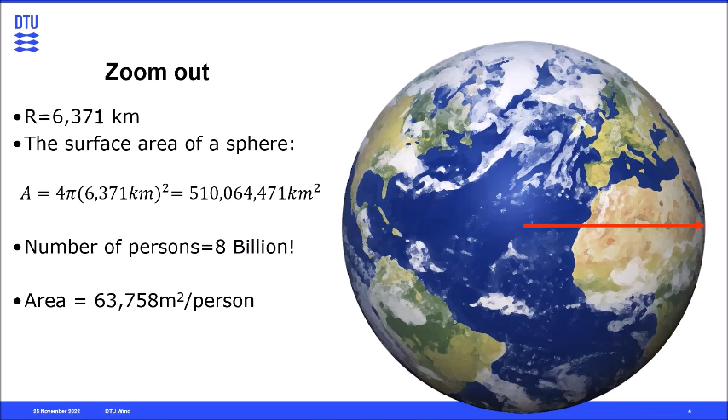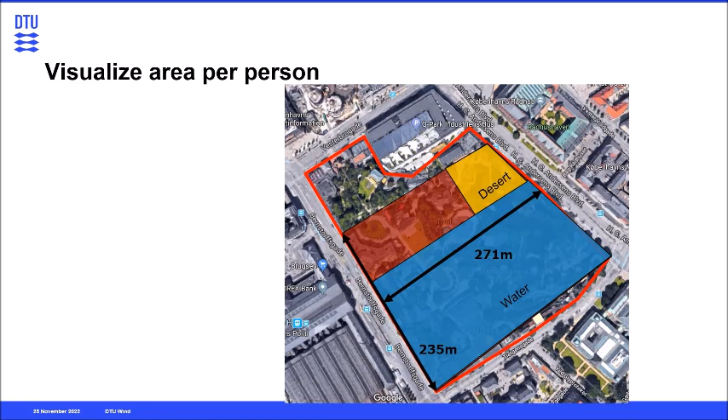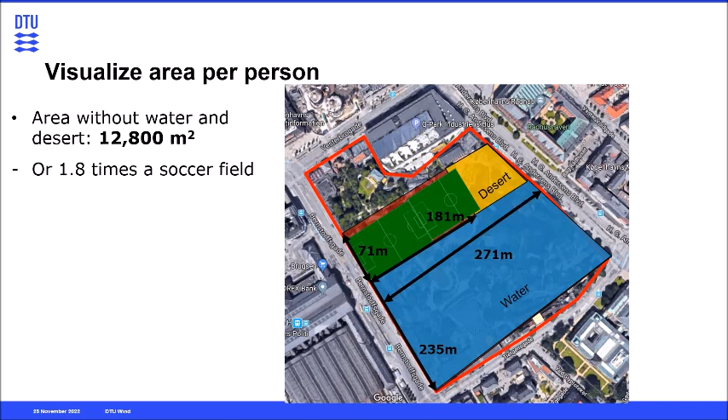What is 60,000 square meters? Well, that can fit inside Tivoli Gardens. The red line shows Tivoli Gardens, and this red rectangle shows the 60,000 square meters. And if we then say 70% of this is water and a third of the land is desert, then we have left 12,800 square meters, or 1.8 times a soccer field where we can live. That's how it is. And this area won't become bigger, because we will be more people.

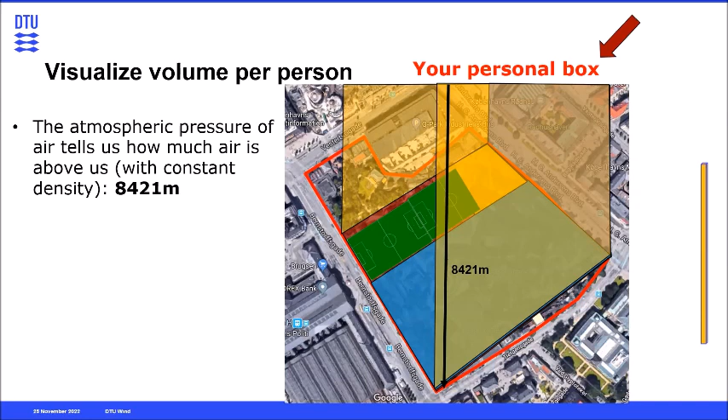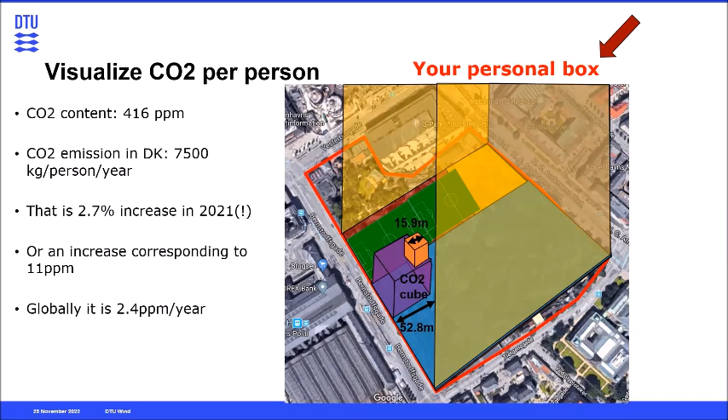You can also find out how much air is above us: 8.4 kilometers of air if it is at the same density. So we live in this straw, 8.4 kilometers high, with an area of 60,000 square meters. If we then look at the CO2, right now we have 416 ppm. We let out 7.5 tons CO2 per person per year in Denmark, an increase of 2.7% in 2021. A Dane will then increase the CO2 by 11 ppm per year. Globally, it's 2.4 ppm.

So to put it directly, we float in the ruthless universe on our 1.8 soccer fields. We have one person here, we have to get food from this area, we have to let out the garbage and so on. So we just have to organize our life in a sustainable way. That's my point. Enough of purpose.

Now I want to tell you about aerodynamics. I will tell you about the background for my research, and then give you selected examples, because I could probably talk for hours, but I have to limit myself. I will tell you about airfoil performance and design, about rotor performance and design, and then of course the polar rotor, and something about teaching and projects and my vision.

So the background for my research is that I arrived at Risø back in '97 to a very well-functioning group of persons led by Flemming, together with Kenneth and Gunnar and Per Vølund and Helge and Niels and Jørgen Thirstrup and Peter Fuglsang and more.

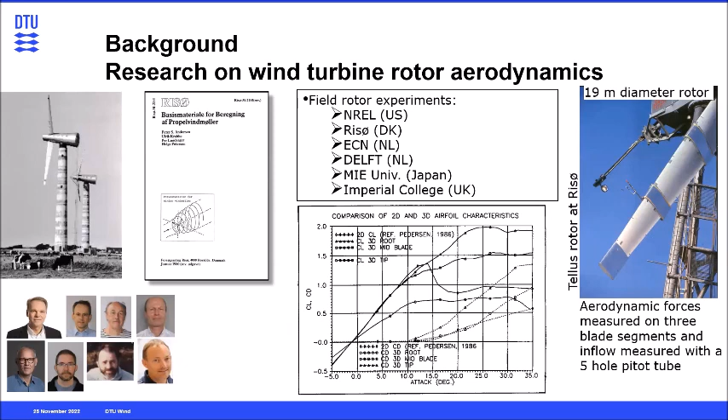So for me, it was an excellent start. I started on super solid shoulders. So this is where I then continued the work from this together with many persons. I will now give you some selected examples. Start out with airfoil performance and design.

So here you can see NREL. They made this test of a 10-meter diameter rotor, put in the world's biggest wind tunnel. A lot of people had to do this together at NREL. So they made this excellent data set, and then I analyzed this. Then I took pressure measurements from 5 different sections on this blade and, not tested it, I analyzed it and realized that this,

this black curve was something tested in the wind tunnel, this lift curve. But if we then analyzed at the tip, then we had the red curve. And if we analyzed at the root, then we had the blue curve up here. So it turned out that even though we tested in the wind tunnel, it was not so easy to know how we should describe the forces on the turbine.

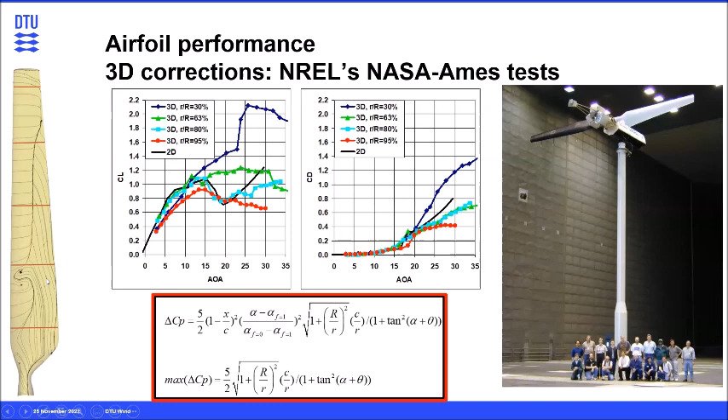So then this 3D correction is about taking what is in the wind tunnel and then correcting it for the forces. And because there are some centrifugal forces running out the blades, you can see the streamlines over here. And then I made this model. And I tested it against another turbine. This is an active stall regulated turbine.

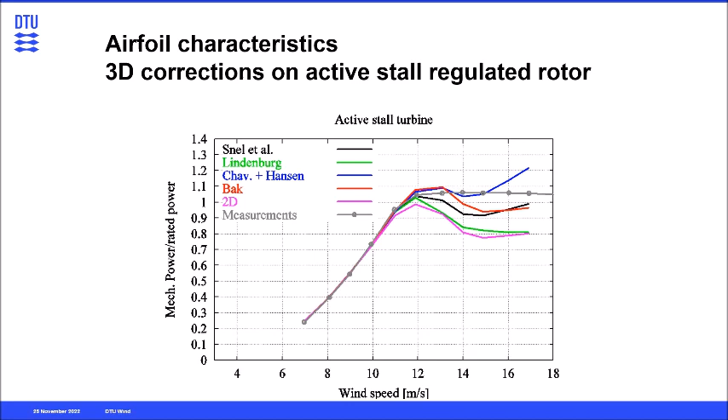And at that time, it was very, very important because turbines were stall regulated, a lot of them at least. Now it's less important, but still important. So this was, you could say, a huge area during the 90s. Then airfoil design was also very important because wind turbines used a lot of airfoils from airplanes. And they didn't really have the right specifications because they were made for takeoff and landing and so on. So we designed different airfoils.

We started actually out with the Risø-B1. There were more before this, but this was the first one that I really was involved in, this Risø-B1. Then I came to the Risø-C2 airfoil, and later also this light rotor project airfoil. So this was again in collaboration with researchers, and during this phase, we realized what was needed for wind turbine airfoils.

So when we run in normal operation, we need the airfoils to be very efficient aerodynamically, and that's the aerodynamics. But then you also have to take care of the loads, and this has something to do with the maximum lift. Should it be high or should it be low? You also have to make it reliable, so we have to put the transition point in the right place, the transition from laminar to turbulent flow.

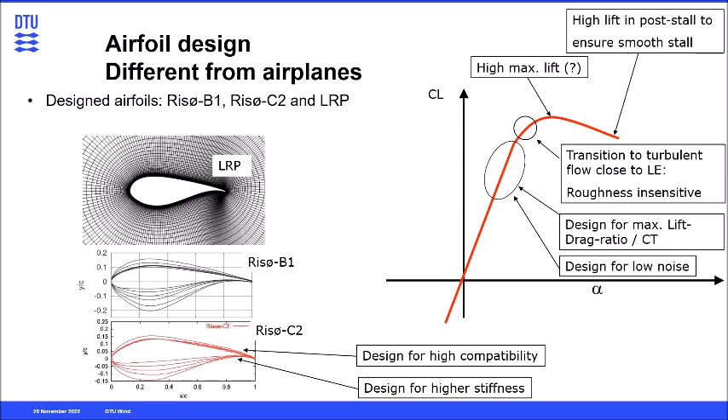We have to ensure something about post-stall, how is it actually separating out there? And then for sure, we have to make design for high compatibilities and design for high stiffness. So this was something we learned during this process of designing the airfoils.

And we tested the airfoils, and here you can see B1 and C2 airfoils tested, and they are very similar. You can say C2 is kind of an update of B1, so we have actually a slightly more efficient airfoil in the C2 airfoils. But what we also did was to license these airfoils.

So we licensed it to many airfoil or wind turbine manufacturers, and they have used it in their megawatt designs. And I could read them, and I don't say where this goes, because that is not what those licensing the airfoils want to let us do.

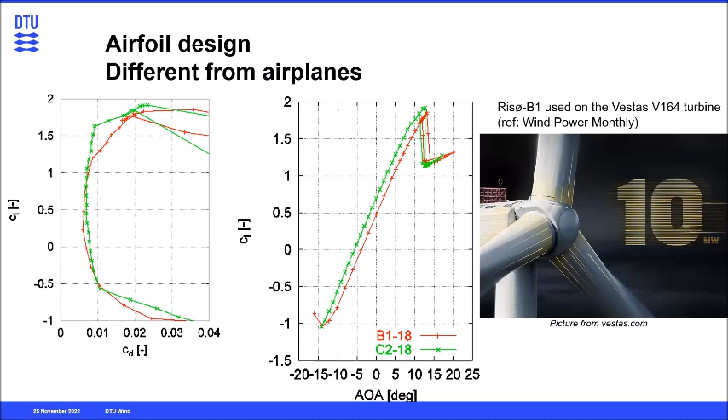But I could read in Wind Power Monthly that these airfoils were actually used in the 10 megawatts Vestas V164 turbine, and this is actually, you can say, the ultimate test of our research, that we can actually go out with our research and let the industry use it and move forward and make things better. So that's, you can say, ultimate test of the quality. And of course, I'm also super honored that they actually dared to use these airfoils. So that's super nice.

Rotor performance and design, I also have worked a lot in. So I want to tell about the dynamic test that Ignacio also mentioned. So the background for this one was actually the NASA Ames test that we saw before. It was also the Mexico test, both wind tunnel tests where we had model rotors tested, and they were very good because everything was in control and we could test a lot of different things. What was not in the test was the actual size. It was the atmospheric inflow. It was the aeroelastic behavior of the turbine and so on.

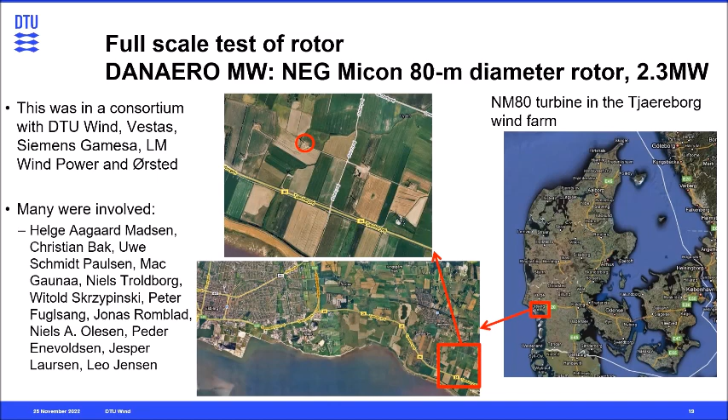So Helge took the initiative to make this project in collaboration with Vestas and Siemens Gamesa, LM, and Ørsted. And you can see we were many involved in this project because if we really want to make a great effort, you also have to be many persons together to do it. So we selected a turbine just south of Esbjerg, and then we wanted to test on this turbine. And here you can see a blade specially made for this test. We have 4 different pressure rows covered with tape, and you can see Helge, Jonas Romblad, and me standing there, and it was mounted on the NEG Micon turbine back in 2009.

Here you can see pitot tubes mounted on the blade, and you can see this special high-frequency inflow sensor also. And all this was then data that came from these tests. And they were analyzed in this International Energy Agency Task 29, and also now in Task 47. And now these data are just on a disk. It's a database, and you just go and take these data. But before it will be data, there's a lot of work behind this.

I found actually a movie from just such a day in the test campaign, where we started out looking at the weather and say, in 2 days we have good weather, everything's good, we can test. We hire a lift, and then I went 5 o'clock in the morning to Esbjerg, and I met the technicians 8 o'clock in the morning, and then we started out. And we started out by unmounting tapes on the turbine and then starting, you can say, the measurement process. And they are then going by the lift up to the first section.

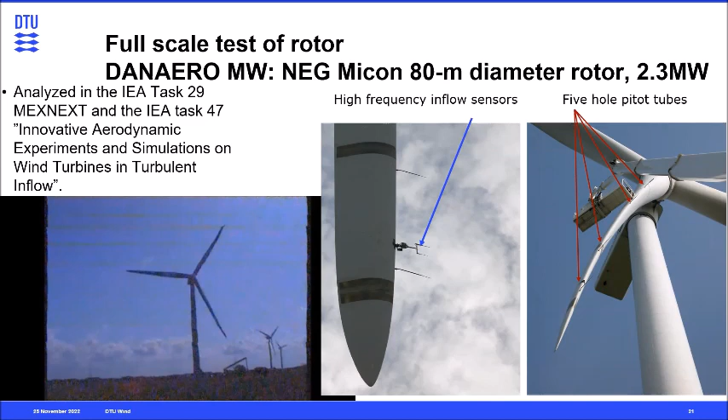I'll take it again. They went to the first section, unmounted the tape, and then they went again to the next section, and then finally we could start the campaign. As you can see in a moment, then we are running the turbine. But such tests cannot be done without excellent technicians. So we have to really have excellent competencies all the way from the super theoretical parts to the very practical parts. Otherwise, such things cannot be done.

And results from this test, you can see here, this was an investigation of the transition from laminar flow to turbulent flow. For those not familiar with this, at the bottom here, you can see a laminar flow where it's layered flow, and then suddenly at one point that we call the transition point, it turns turbulent, and then the boundary layers will grow more. And because of this, the more to the leading edge we have the transition point, the bigger the drag will be, and the less efficient the airfoil will be. So it's important to know where we have this transition point.

And as you can see in these plots, black is laminar flow, gray is turbulent flow. This transition point actually moves around when the blade is either up or down. But even though we have this, there will still be fluctuations. That is also because of turbulence in the air and so on. This is the lee side of the turbine. This is the wind side. So this is the pressure side, and this is the suction side. So this is very important, very unique.

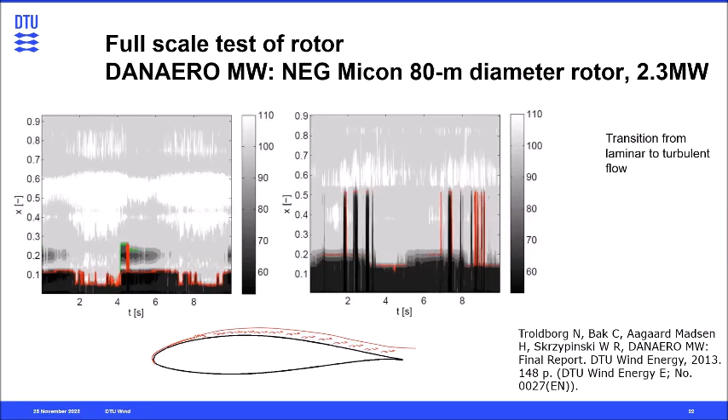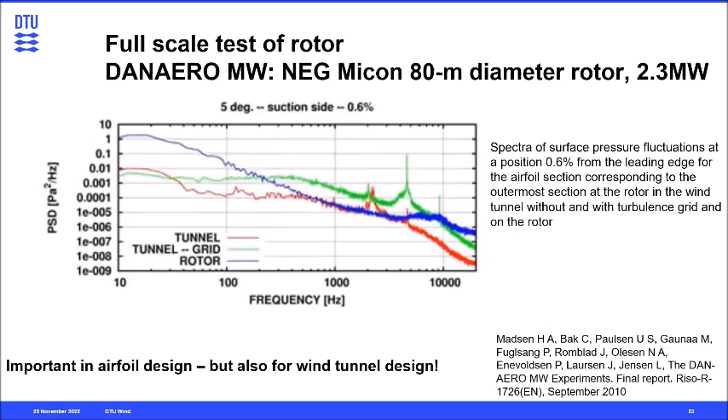I will turn to rotor design, because I was responsible for this 10 megawatt reference wind turbine. And that started out in the LightRotor project, again, together with many persons. And in this LightRotor project, we wanted to make bigger rotors lighter, because we have to fight this square-cube law, as we call it. So in this LightRotor project, we wanted to have a starting point for the optimization, but we couldn't get a blade, so we had to make a blade.

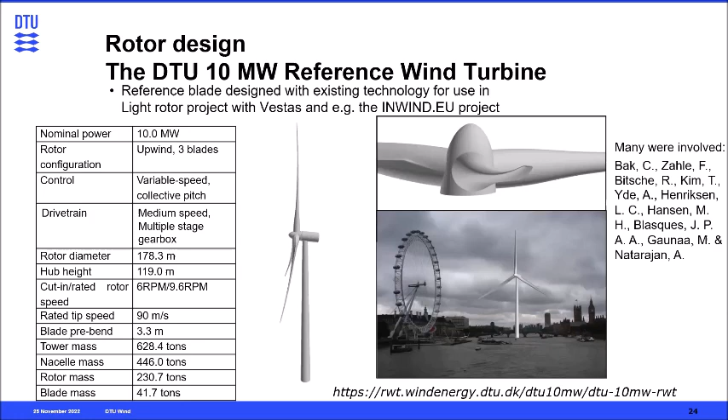So we made this reference wind turbine, where we had aerodynamics and structural layup being absolutely consistent. So, you can say, the airfoils were consistent with the actual aerodynamics. So this was made to support such an optimization process. And the objective was to make it as a starting point, and then we also could test our tools, HAWC2, HAWCStab2, BECAS, HAWTOPT, EllipSys 2D, 3D, and so on, and establish an open source model.

To the right here, very nice computations on the blade, and then we used this setup and this reference turbine to optimize it. And you can see an example over here where we have the short blades. This is seen from two different sides. The shorter ones are the DTU 10 megawatt, and then we could actually increase the length and thereby the energy by optimizing it. So the DTU 10 megawatt reference turbine is not an optimized turbine, it is just a turbine that was made in a sequential way, so we could get, you can say, just a traditional turbine made.

And it was not only us actually that had the use of this. When I checked last week, we had more than 30,000 downloads of the description of the turbine. So that was nice that somebody out there could actually also use this turbine.

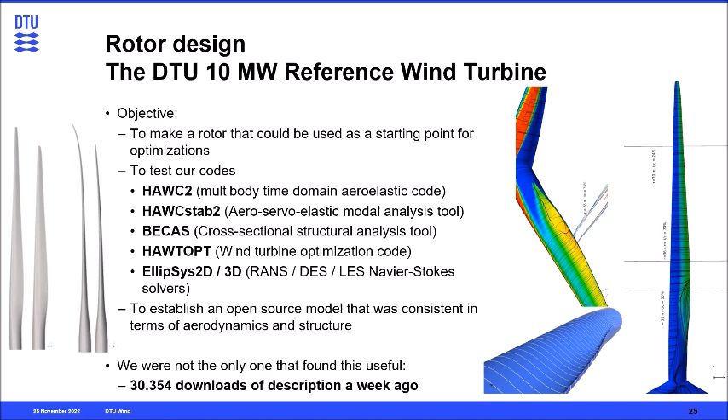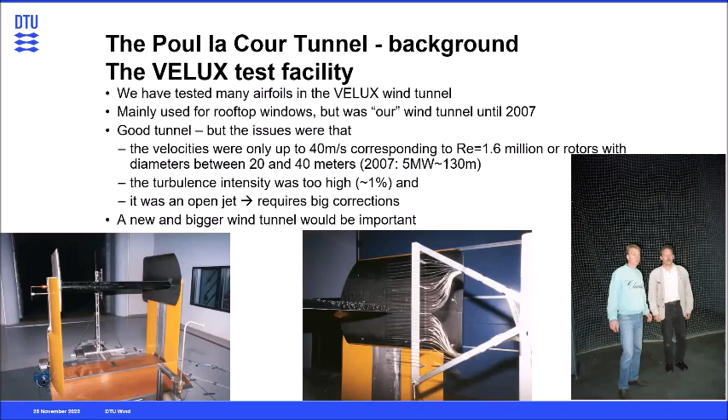I will go to the Poul la Cour tunnel now. The background for that one was that we tested in this Velux tunnel for many years, starting out in the early 90s, and this was actually our wind tunnel until 2007, where we made our last test. It was actually a good tunnel, but we had some issues because the velocities were so that we could only make tests corresponding to diameters between 20 and 40 meters, and in 2007 we were at 130 meters. So there was a bit of a gap there. We also had a turbulence intensity that was too high, and it was an open jet, so it required big corrections. So we simply just needed a bigger and better wind tunnel.

And we did so. We actually got a project granted where we talked with the stakeholders in Denmark, the industry, the universities, the developers, and so on, all stakeholders. And we specified a test section, where you can see the specification here.

And we also should do this for a fixed amount of money. So that actually was a challenge, you can say. And what do you do if you don't know how to build a wind tunnel? Because now I know, but I didn't know at that time. So we were kind of blank, even though we had many good people. So we should build this tunnel for this purpose.

And then I tended to say at that time that we had to go in a Pac-Man mode, just eat one cheese at a time and get a solution to what about EU regulations, what about power to research, what about, and there were a lot of small things that we had to solve during this process. So that was fun.

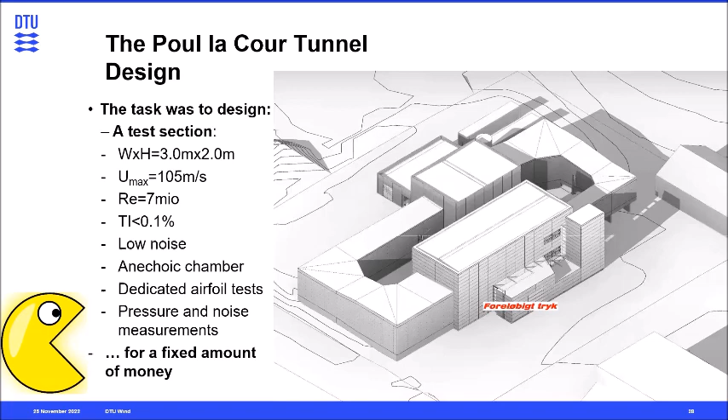Drawings are very nice because you can always undo stuff. You can always go back and change something and say, no, we don't want it like this. But when you drive in tons of concrete and steel, then there is no undo button. And if you had made an error, then it would stay there for 50 or 70 years or so. So that was both very rewarding to see it growing from the ground, but also a bit scary because we didn't know how it would work actually, to be frank. So such a one-off thing is interesting to build.

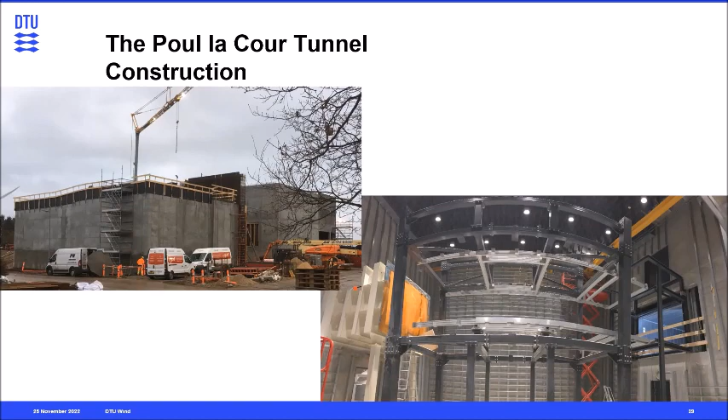And then we came to the first operation, and we had a sprint team working day and night up to this inauguration. Robert, me, Jimmy, Sigurd, Andreas, Anders, and that was fun and hard. And then also, the first day we should switch on the fan. That was also very interesting because that was the time where we didn't know if the cooling circuits would break down or the guide vanes would stall or something did not happen the right way as we thought. So here we can see how

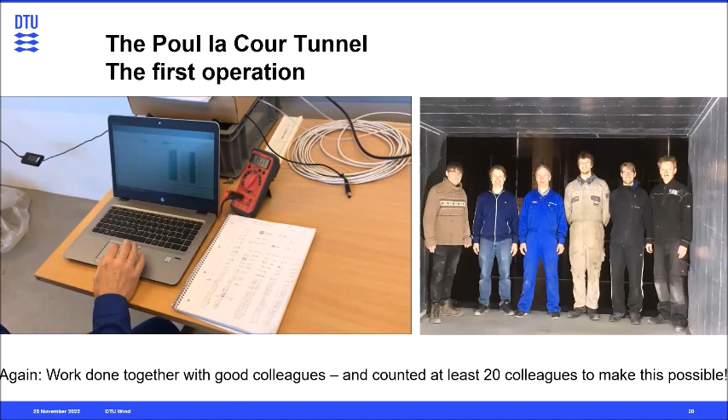So this was very noisy, and that was very low tech to sit with a paper and a pen and a voltmeter and a pitot tube, but that was how it was at that time, and very efficient and very interesting. That was a very important day for us to see that it actually happened the right way, and it worked super nice. And we had this inauguration with His Royal Highness Prince Joachim. That was also a great day, to show this nice facility to the rest of the world.

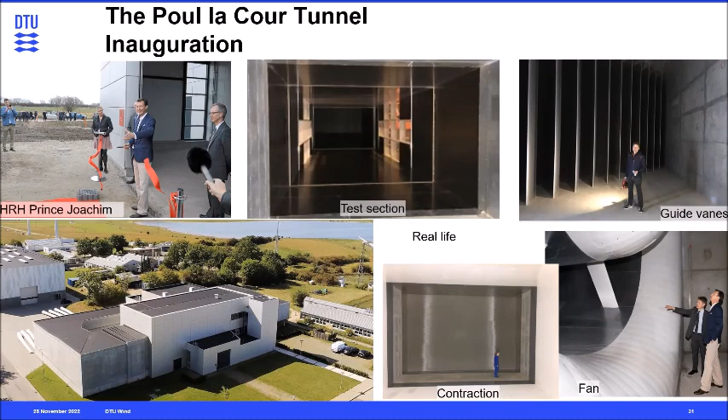And we continued after the inauguration, of course, because we had to instrument this wind tunnel with different configurations. We had the aerodynamic configuration, and then we had the aeroacoustic configuration. So the aerodynamic configuration has these glasses and hard walls included, so we can actually test the aerodynamics at very high speeds. And then we have these Kevlar windows that can confine the flow, but where the noise can be emitted through the Kevlar and then be measured by the microphone array out here.

So we actually obtained what we wanted. We obtained the high flow speeds up to and more than 105 meters per second. Check. We obtained the low turbulence intensity below 0.1%. Check. And also we obtained the low background noise that we had hoped for. Check. So that was very nice to experience.

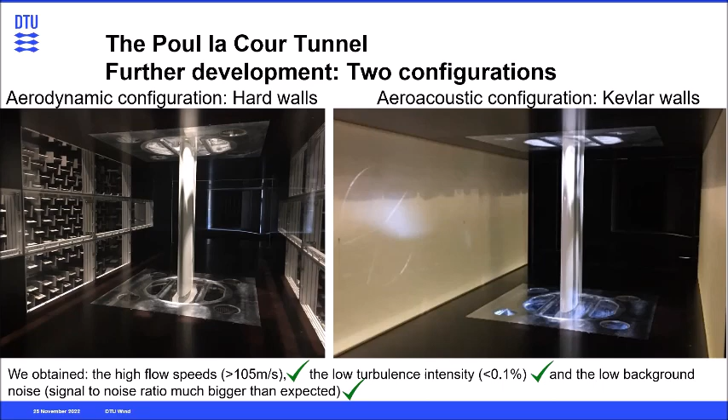And we had the Aeroloop project with Vestas, Siemens Gamesa, LM and Suzlon, where we had different activities. So we made aerodynamic benchmarks against other tunnels. It fitted very well to other tunnels. That was nice. We had aeroacoustic comparison also with Virginia Tech. That was nice. We had build-up of a LiDAR in the wind tunnel. I would say that's work in progress. We had establishment of a measurement system from laminar to turbulent flow with thermographic cameras where we can measure the transition line.

We had a dynamic setup being built, so we could actually test pitch movements of a blade. And then we had this digital twin where we can actually compute the flow in the wind tunnel. And that is actually super important because then we can investigate a lot of details in the tunnel that are hard to see in real life. So with the digital twin, we can see what's happening. And then we can also measure some things in the tunnel and go back to the computation and see, are we actually computing the right thing? So this interaction between measurements and computations is very important and has to be a continuous effort also in the future.

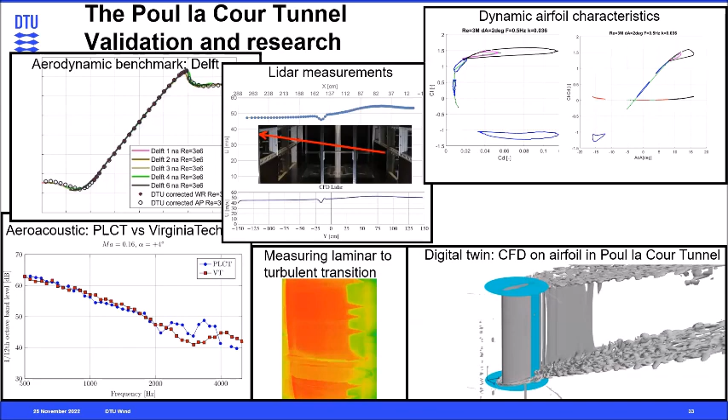And I've done a lot more. I've designed blades for smaller turbines. I investigated tip losses, double stall, trailing edge flaps. You can see trailing edge flaps there. Wind tunnel test of add-ons over there. Full-scale measurements also of vortex generators there. Erosion, a lot of measurements of erosion you can see up here in the wind tunnel, and then erosion safe mode where we reduce the velocity of the blades to save them from damage. Urban turbines, and then also this funny autonomous street lamp with both a wind turbine and a solar cell and more. So I have been somewhat around in my research.

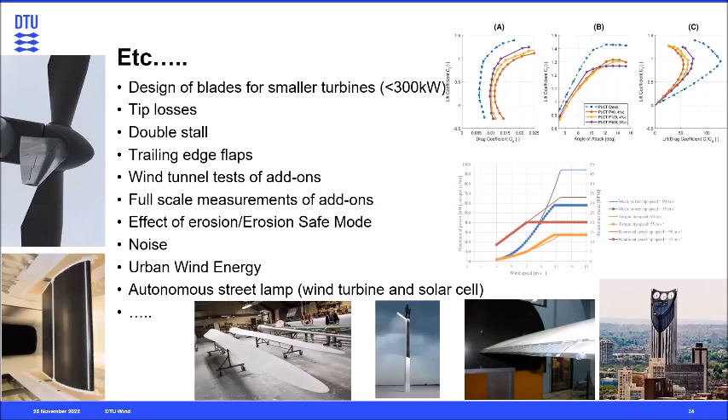And now to teaching and dissemination and projects. Because in 2008, we were allowed to start PhD projects because at that time we merged with DTU, and then we were actually allowed to educate PhD students. So it started at that time, and I've been main supervisor for these 6 PhD students. And there are, you can say, 3 themes in this.

There are rotor aerodynamics, rotor design. That's where I work with Mads Døssing and Carlo Tibaldi and Kenneth Lønbæk. Then there is this urban wind energy that was a great project with Christina Beller. And then leading edge roughness or erosion, where I've worked with Emil Kruse and Tahir Malik, that's actually ongoing right now.

So that's interesting, and that's also where you find out that the PhD student is actually struggling with the rotor aerodynamics, and you realize that it is actually a super complex topic, and this also pushes you to try to explain things. It also pushed me to try to explain it in the textbooks, aerodynamic rotor design and aerodynamic airfoil design, and teaching in master courses also forced me to understand things better. It's actually a challenge to explain what you know, but it's also a big privilege to do it. And actually then you also learn yourself.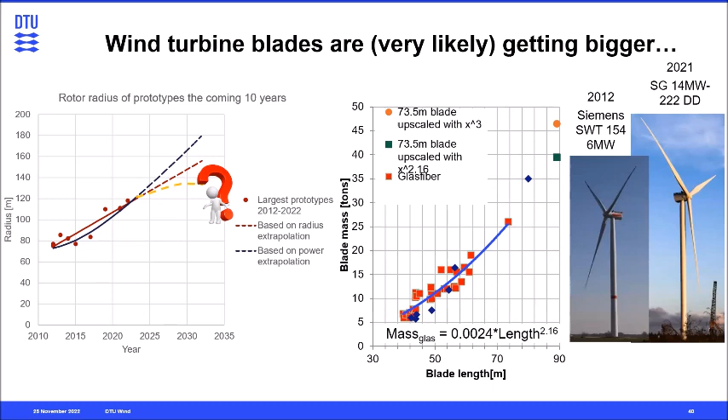And maybe there will also be, you can say, other branches of wind energy where we go to remote areas and put up turbines working, you can say, offline. You never know. Otherwise, we can support this also.

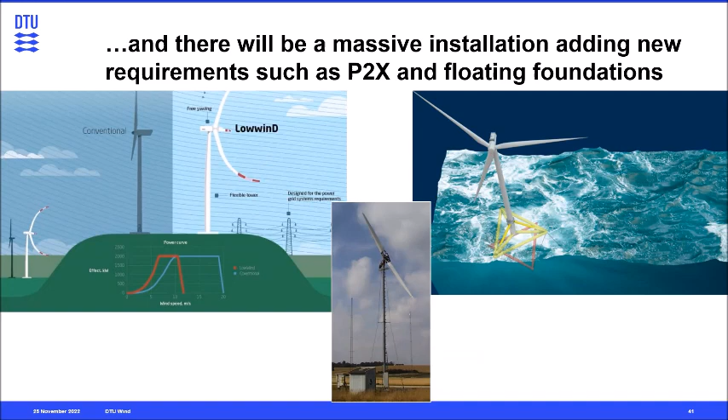And then we should also balance between thick airfoils and mass and energy production. So we should try to find out what is the right balance between aerodynamic performance and structure. Design for X. So we should design for X. That means we could design for power to X or sustainable materials or something else. So the turbine should be designed for its purpose.

And then also we should try to go towards digital certification of blades. So we have a blade design here, and then we make it in real life. And then we have updated measurement methods where we pretty fast can get a very detailed description of the physical mechanisms, and then put it back and make precise models. So we actually can trust the models more and more and more. And in the end, hopefully, trust the digital versions of the turbines.

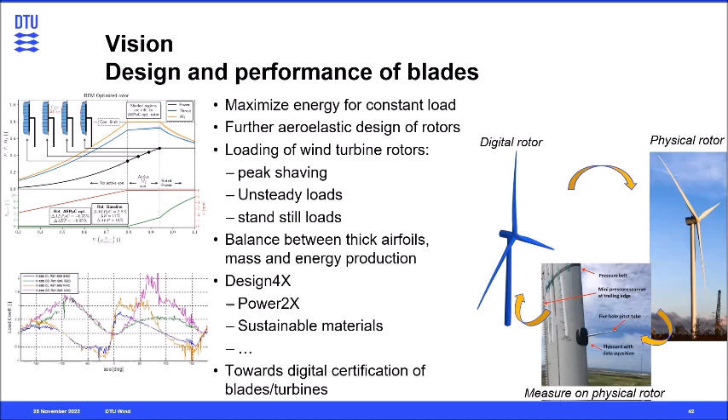Also, design and performance of airfoils. We should continue studying this 3D correction. You can see here how the flow is separated and how we should describe the flow in here. So that's 3D corrections. We should study high Mach numbers. You can see how the lift curve of an airfoil is actually changing, whether we have with the purple 70 meters per second or 140 meters per second. So this will actually change the forces whether you run with one or another wind speed, or you could say rotation speed.

You should also study inflow and inflow turbulence. So if we have high turbulence, then we will have much drag, and if we have low turbulence, we will have less drag. So that's super important also for the performance of the turbine. We have to understand roughness, such things like this. How will this actually influence the aerodynamics? Thick airfoils, high Reynolds numbers, of course, because when the blades are getting bigger, we get higher Reynolds numbers, so we have to cover this somehow. And then aerodynamic and aeroacoustic add-ons, like these vortex generators, we have to also understand even better.

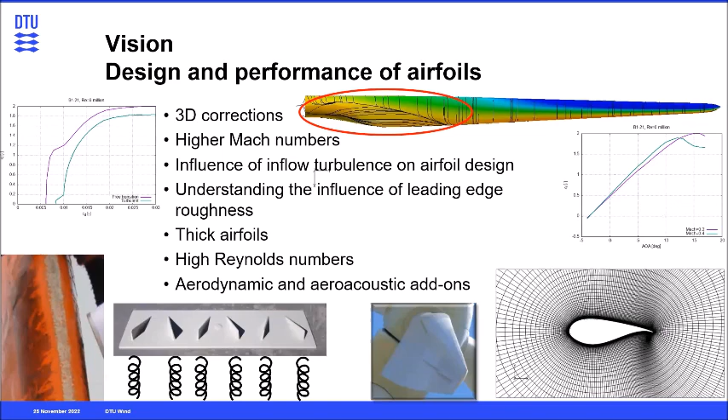And not least the Poul la Cour tunnel, we have to understand the flow in the test section better. We have to develop the test methods, update, you can say, the acoustic measurements, not because they are bad, but they can be better. Visualization techniques like this PIV system with a laser sheet, the dynamic behavior of airfoils, we also have to investigate that.

And then connect the tunnel to the rest. So we have, you can say, the Poul la Cour tunnel connected to, for instance, the rotating rig over here. You can see how that works. And then connecting this also to a full-scale rotor. So this about understanding what's going on in the wind tunnel to what's going on in a rotor is super important.

And that actually then is looking back to where I started. Because at that time, I also had to understand why wind tunnel measurements did not fit to turbines. So even after 25 years, I'm back. But I'm probably spiraling like this, so the knowledge level increases, but I get back to the things to kind of refine it.